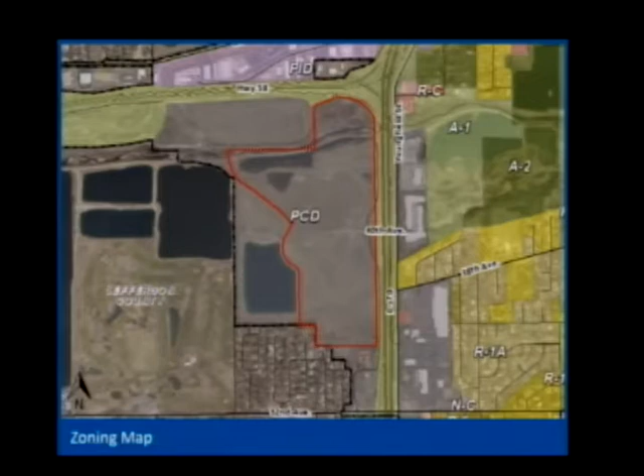The previous approval from 2011 was a very highway-oriented retail, commercial, office, and warehouse development, centered on a Cabela's and Super Walmart site.

The proposed mixed-use development is a lot more flexible. It will continue to allow many highway-oriented retail, commercial, and office uses, while proposing to expand the use chart to include residential, entertainment, and other employment uses in a very live, work, play environment. The emphasis on placemaking is also much stronger in this proposed zoning than it was in previous approvals for this property.

I'll go over the pieces of this planned mixed-use development because it entails a little bit more than we're typically used to seeing. For this project, we are reviewing an outline development plan with a design pattern book and vision book. As a quick reminder, the commissioners have reviewed many plan developments before, so you know there's two pieces to every plan development.

The first part is the outline development plan, which we're reviewing today, and then, if approved, later will come a specific development plan.

Let me describe these three documents in detail. The 4-page ODP establishes land use concepts, circulation, and the general character of the development. There's an excerpt here from the ODP document. This ODP divides the property into 8 planning areas, which you can see divided up here, as well as the arrows which signify circulation concepts that we will use moving forward in the application if it does move forward.

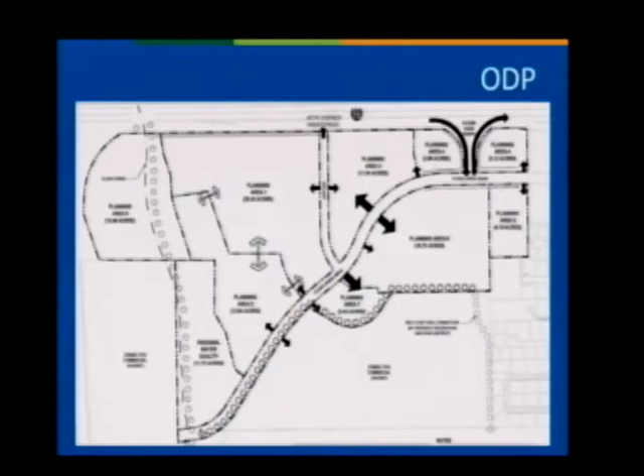The design pattern book is a type of document we don't typically see with developments in Wheat Ridge, but it's not uncommon for a development of this size. The book establishes specific development standards for each of the planning areas, as well as standards for architecture, public space, landscaping, parking, bike parking, and the list goes on and on. As you have the document in front of you, it's a pretty long and lengthy document. It's very similar in form and function to the city's architectural and site design manual, so we would use it in the same way, just specifically for this property.

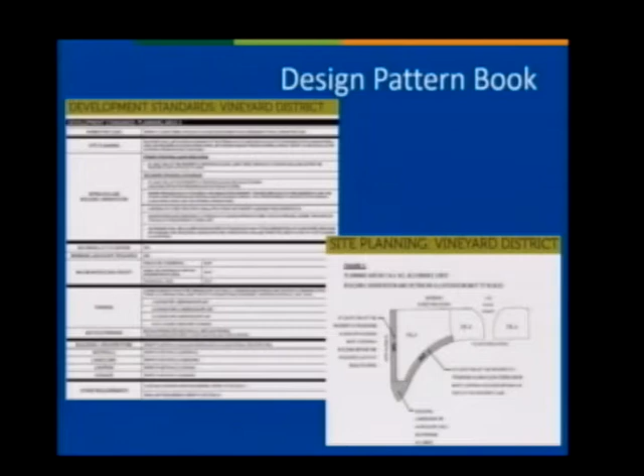The ODP and the design pattern book are regulatory documents, so if they are approved, they essentially are the zoning documents for this property.

The third item is a vision book. This vision book is less regulatory in nature. It was important in the process of developing the plans for this property and determining what exactly this next iteration of Clear Creek Crossing looks like. And it will be helpful in sharing that vision with potential future tenants of the property, assuming approval of this zone change.

As I mentioned, there's 8 planning areas in this development. I'll go through each of the development standards pretty briefly, not line by line as is in the design pattern book in front of you. Planning area 1 is located north of 40th Avenue, adjacent to I-70.

It has a wide array of commercial and retail uses. Auto-oriented uses are not permitted in this area. It also permits residential, public, hospital, office, hospitality, and entertainment uses. So it has a good orientation towards the highway, so there's a wide array of uses that are allowed.

The orientation of this property generally will be toward Clear Creek Drive with a secondary orientation toward 40th Avenue. So we'll be looking for somewhat of a build-to along Clear Creek Drive and 40th Avenue with some flexibility, as you can see in the design pattern book. One other thing to note in this planning area and several others, there's a plaza gathering space and public art requirement that will be required to be fulfilled when they come in for an SDP application.

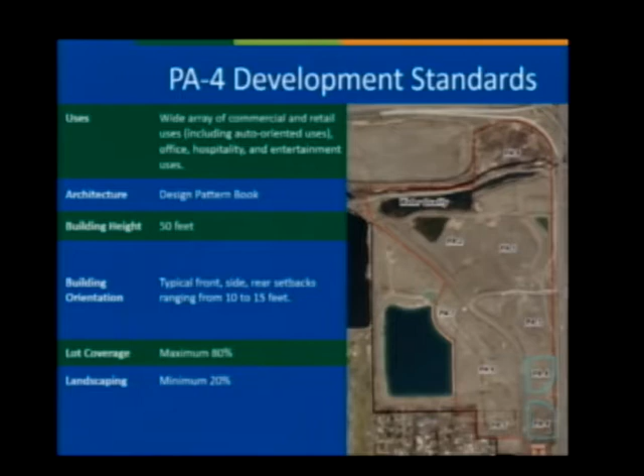Planning Area 4 is located south. It is split into two, with the proposed hook ramps from I-70 in between, funded as part of the 2E ballot measure from 2016. This is a very auto-oriented area, and the permitted uses reflect that. The building orientation is more typical of suburban development with setbacks ranging from 10 to 15 feet, and there are no build-tos in this area.

Planning Area 5 is one of the first properties you enter traveling north on Clear Creek Drive, or the future Clear Creek Drive. It has a wide array of commercial, retail, residential, office, hospitality, and entertainment uses. One important thing to note is there is a required 20-foot landscape buffer adjacent to the lower density residential to the southwest of the property.

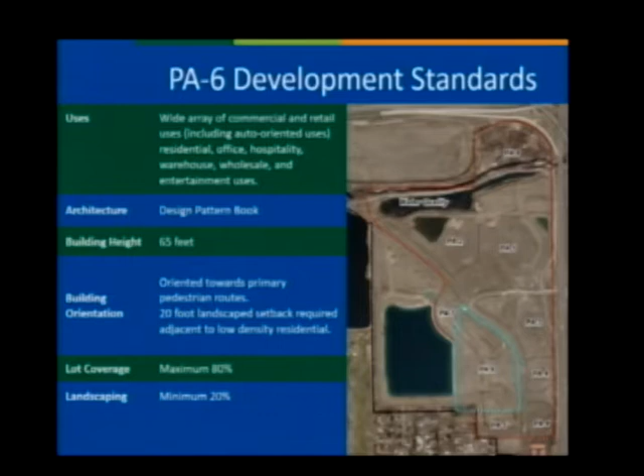Planning Area 6 is very similar to Planning Area 5 in terms of uses. Staff wants to see the buildings oriented towards the pedestrian pathways that connect to the rest of the site. This also has the 20-foot landscaped setback requirement along the small portion adjacent to the low density residential to the south.

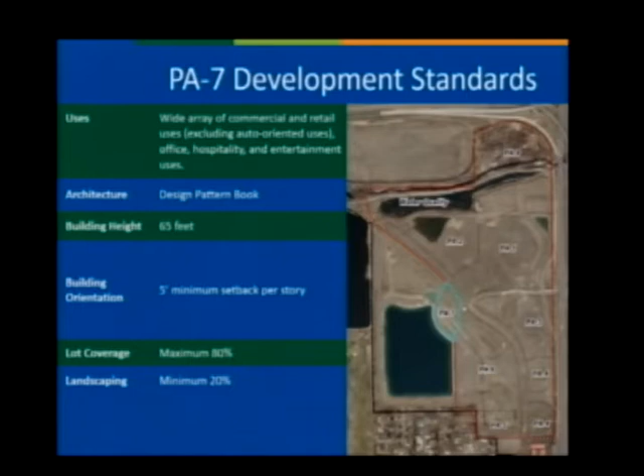Planning Area 7 again is very similar to 5 and 6, with 5-foot setbacks per story, pretty typical suburban development.

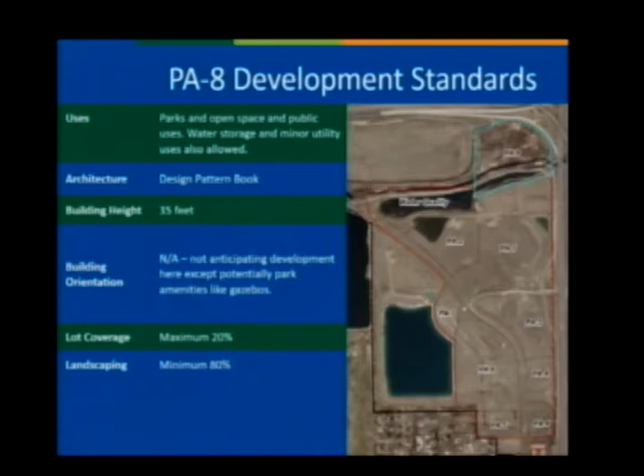Finally, Planning Area 8 is the portion located north of Clear Creek. The only uses permitted in this area are parks and open space, plus some minor utility uses and water storage. So there will be no development on this section—parks and open space only.

Got lost in my notes here, sorry.

There was a neighborhood meeting held on December 6th of 2016, with approximately 60 neighbors in attendance. Questions generally ranged from potential tenants, number of units proposed in the residential portions, trail connections, and the like. The applicant has held additional neighborhood meetings as recently as earlier this month, outside the city process, done in good faith to keep the neighborhood engaged given the long process. They've also held additional meetings on topics including I-70, the hook ramps, potential transit access into the site, leasing focus groups, and other things that go into making a project like this work.

As with every zone change, there was a public posting and notification requirement. We did not receive any letters until today—we received one letter of support that was passed out on the dais when you arrived. We also received one phone call or message; I returned that call but never heard back. They were asking about this public hearing, so hopefully that person made it.

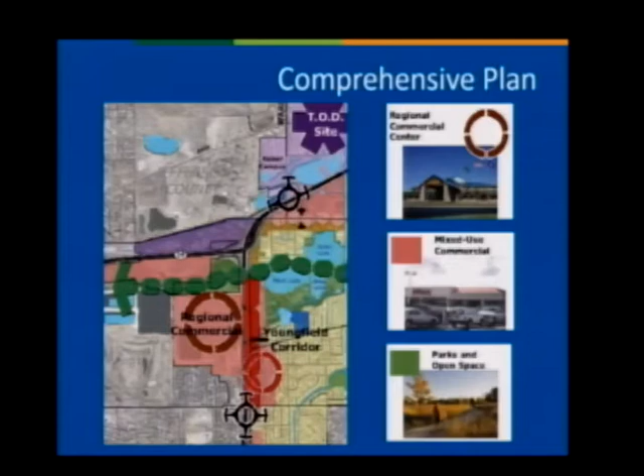While the current development plans differ slightly from the comp plan designation of solely commercial, staff feels the inclusion of residential components and smaller tenants anchoring the site, as opposed to two large ones, is indicative of changes in the retail market, changing housing demand, employment locations, and smaller retail in the metro area marketplace. The comp plan is nearly 10 years old, and it is in the public interest to approve a zone change that responds to these changes in the metro area marketplace.

Just quickly, I'll flash these up and I won't read them. These are the outline development plan criteria: health, safety, general welfare.

The proposed development is not feasible under any other zone district, which is why a planned district is being proposed. There's adequate infrastructure and facilities on the site, or there will be, and the change of zone is in conformance with the comprehensive plan goals, objectives, and policies.

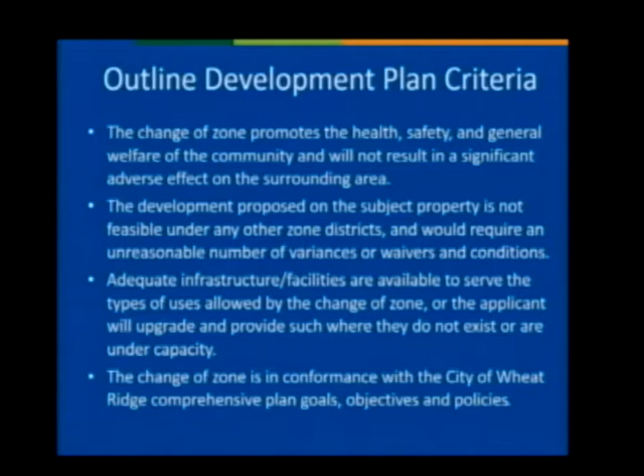So staff recommends approval of the zone change from planned commercial development to planned mixed-use development for the following reasons. We find that it does promote the health, safety, and general welfare. It will not result in a significant adverse effect on the surrounding area. It will be adequately served by public infrastructure and utilities, as is detailed pretty thoroughly in the staff report.

It is consistent with the goals and objectives of the comprehensive plan, in addition to providing for a community need that was not anticipated at the time of the comprehensive plan adoption. It also provides a circulation network that is supportive of the city's goals related to bike and pedestrian connectivity, which we recently passed the bike and pedestrian plan.

So this is just another reason for staff to support the project. We would add one condition to the approval, and that would be to add residential heights to planning area 1 of 65 feet. That height is consistent with the adjacent planning area. It was just an oversight that residential is allowed in planning area 1, but there was no height specified for that specific use. So staff would recommend approval with one condition, and we can go over that again once we loop back to that point in the hearing.

So at this point, I'll take a seat and we can answer any questions that you have on these documents, or anything that's in the staff report. And then the applicant is, of course, here and prepared to make a presentation as well, if you desire. Thank you. Commissioner Bucknam?

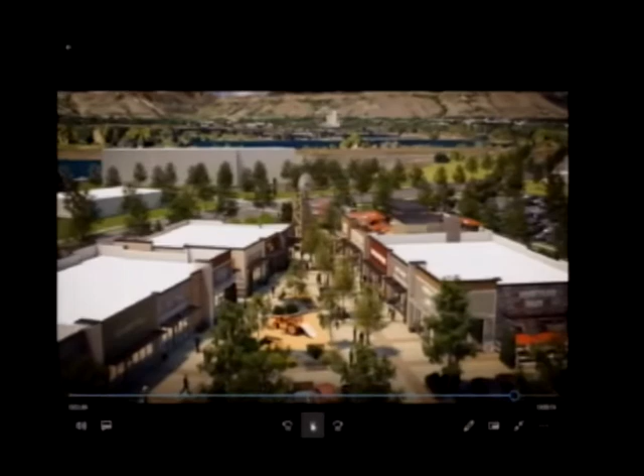As a quick preface, what you have before you tonight from a zoning and design pattern book standpoint is the result of about a year and a half of work—thousands of man hours and hundreds of thousands of dollars for our company—in an effort to transition this property from a vacant piece of land that's sat undeveloped for decades into a long-term community asset for the city of Wheat Ridge and the greater Applewood area, most of which isn't even in the city. Right now, finding a place where the community can gather on the west side of town is hard to find. As much as I love the Applewood Center, it's not a place you want to linger in the parking lot very long without risking your life. With this property, we have a unique opportunity to create a mixed-use environment where development occurs that's not otherwise possible within the city, partly because of the flexibility allowed in the zoning documents before you.

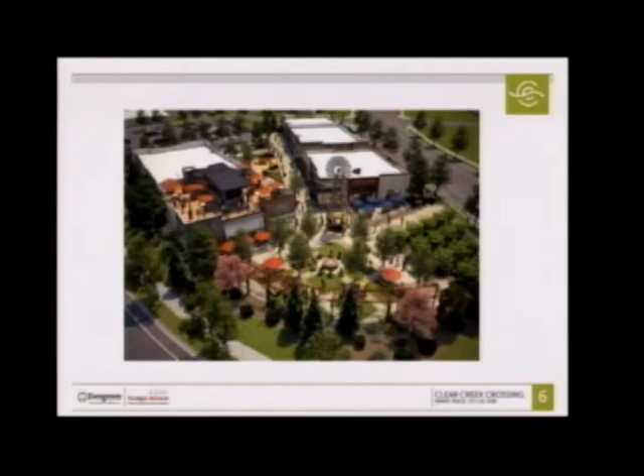But what we're trying to do here is create environments within a broader project that have that sense of place, where you feel safe, where you can linger - and it's really important to us.

So another shot of that with some really great western views. Again, when you're planning a 100-acre project, you have to divide it into districts.

I don't want to belabor this, we've already gone through it. We've got the Mill District, with employment, Homestead, intended to be residential, Vineyard, intended to be retail and food-oriented, and Harvest, intended to be more retail and entertainment-oriented.

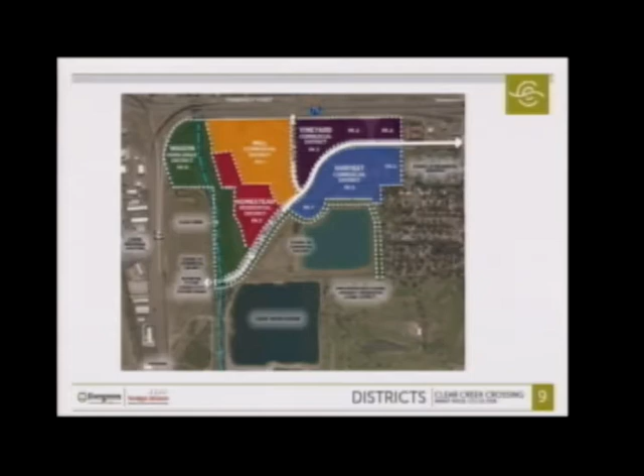How do you interface with the street grid? How do you create build-tos to create a sense of place when you've got topography you're trying to manage? How do you address and take advantage of the asset that Clear Creek presents, and orient planning areas 1 and 2 to leverage that asset? How do you take advantage of views of the mountains?

How do we also dance around the fact that Denver Water right now is dropping a second 84-inch pipe that slashes right through the project that we can't build on top of?

And then how do we be sensitive, as you raised, Councilman, to the neighbors who have lived there for years, who have overlooked fields and have got horses in the backs of their property, as Roxanne does—I know her. How do you be sensitive to that? Because their life is going to be changed. There will be more light, there will be more noise. How do you mitigate those impacts to the degree possible?

So the street network and the placement of these planning areas is a result of us analyzing all of these site constraints that impact how you can plan this property.

And then once you do that, we've got to interface all the connectivity, both vehicular circulation and pedestrian circulation. One thing to highlight on this slide is the dotted lines.

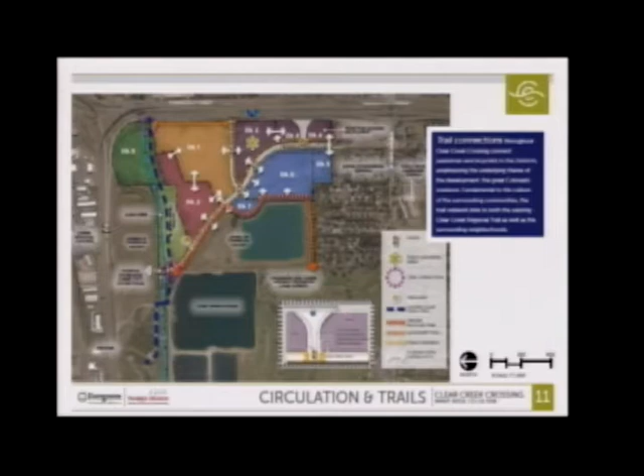So we're actually routing pedestrian traffic on the east side of Clear Creek Drive across to the west and then back over, because we wanted to avoid that pedestrian conflict. So all this being said, it's been very intentional and thoughtful about the interconnectivity between planning areas, reflected in those white arrows, and also connecting the neighborhoods across the site to the creek.

Right now it terminates and turns by the La Quinta. There's a gap west of the La Quinta that's a field where right-of-way has already been acquired. That's where Clear Creek Drive will connect through. So job number one is to build the new off-ramp.

Once that's complete, number two is the existing 32nd Avenue off-ramp will be decommissioned and removed, and you'll no longer be able to get off there. You'll get off at number one. Then the third thing, which addresses your concern, Commissioner Dorsey...

Number three, there'll be a new flyover bridge. The new on-ramp at Clear Creek Drive will run parallel to I-70 but not merge. It will go over a new bridge across 32nd Avenue, meet up with the existing 32nd Avenue westbound. They will pre-merge, and then downstream merge onto I-70.

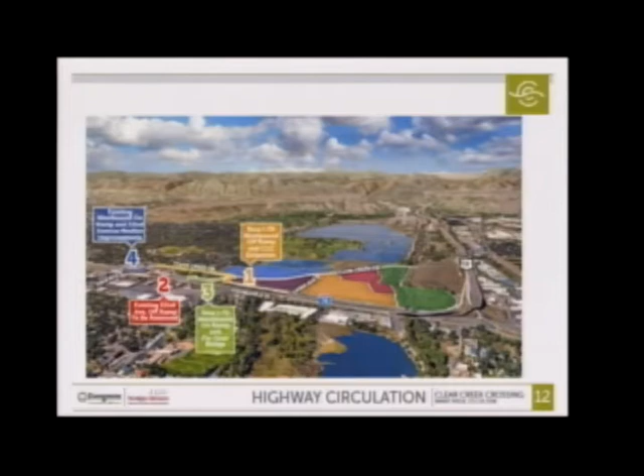Back to the districts, I don't think we need to belabor it. We have cute names, we have cute pictures. The intent is we have real uses that address the needs of the region and community going forward.

The Mill District is focused on employment uses. It's where the highest intensity and heights are allowed in that district.

Because we don't have a committed anchor or employer user for this, Commissioner Ohm, we've asked for the broadest possible set of uses within reason. We had a lot of discussions over the last year about what's reasonable to request, because we're looking at things from R&D campuses to Amazon HQ2 to potential hospital uses, to more traditional retail that could still happen here.

I don't think we're going to get Costco showing up wanting to do another store, but that's still possible. Planning Area 1 is where Cabela's was originally going to locate, so it is a great retail site. The problem is, because of Amazon, there are no anchor deals being done right now of any significance.

So this planning area has two primary access points: a signal on 40th Avenue, shown in the graphic, and another full-movement driveway that splits with the Homestead planning area on Clear Creek Drive. There are build-to requirements that vary depending upon the type of use.

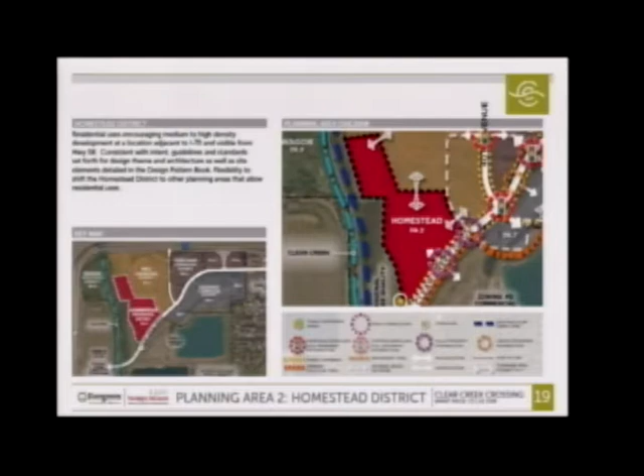And your western views will be unimpeded because it's Coors water storage facilities. It's going to be a tremendous place to live and a great opportunity for someone looking for that type of lifestyle. Access will be off Clear Creek Drive, and interconnectivity with Planning Area 1 is really important. I won't go through all the details, but we can circle back if you'd like.

Vineyard is the heart of the project in terms of placemaking, but because of the topography it's kind of broken up, which is why there's a Planning Area 3 versus a Planning Area 4. Planning Area 4 sits high, as Commissioner mentioned, basically directly north of La Quinta. It's where the homeless camp used to be—I met our friend there before we cut some of the trees down.

It's going to be very intense from a traffic standpoint because that's where the freeway traffic comes in and out. One thing that impacts Planning Area 4 is what's called an A-line—CDOT has this line you cannot cross with access, basically a certain distance from highway interchange ramps, which impacts the planning of Planning Area 4. But it'll be more traditional automotive highway type uses.

Then Planning Area 3 steps down—that's where there's the significant falloff, and we can use that topography to our advantage. In the corner of Planning Area 3 is where we anticipate doing the crossing, where we're going to create a placemaking environment. No development is allowed at that point by zoning, and that's where the plazas will be. It'll actually sit higher than Clear Creek and 40th Avenue at the intersections, elevated above the street traffic, which will be a really nice effect.

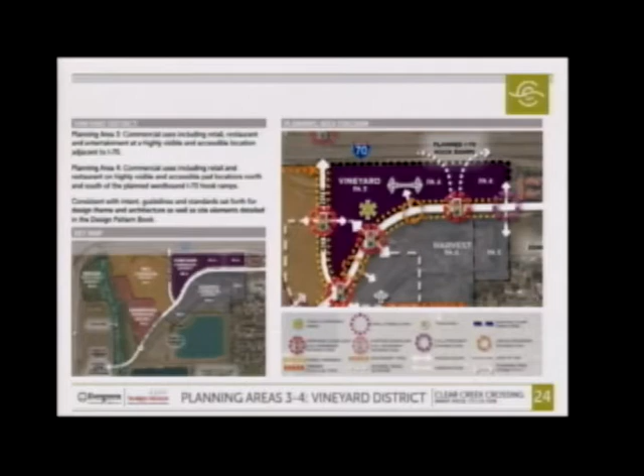Then the Harvest District includes Planning Areas 5, 6, and 7. Planning Areas 5 and 6 are in a hole, and one thing that's easy to get confused—just to the right of Planning Area 5 you can see another area of green. That's the lot that sits at grade with the homes. It's not owned by us, it's not in our project—it's owned by a different developer, actually the one who did La Quinta, the gas station, and Good Times. So that sits high, and that's where I absolutely agree with you: if we were planning that area, 65 feet would not be permissible.

Planning Area 5 is the sled hill—it's the hole. It was going to be the back of house for Walmart, as you mentioned. Walmart was going to go on Planning Area 6, and Planning Area 5 was going to be basically the hole behind Walmart where the loading dock activity would be. Because 5 and 6 sit anywhere from 40 to 60 feet below the houses, we believe there's an opportunity there for height.

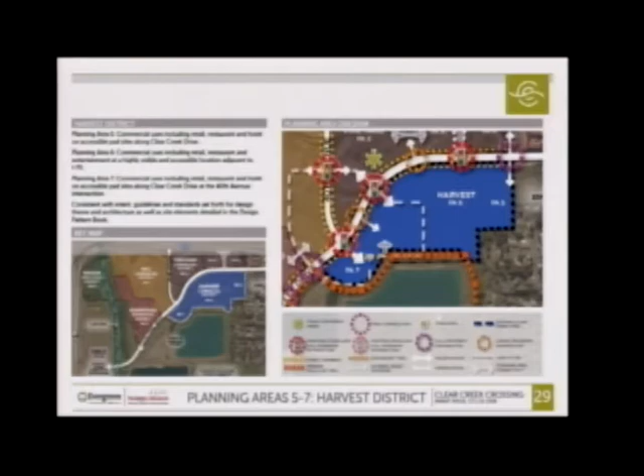The intent is not to do height here—it's probably going to be single story structures. Our goal here is this is where the entertainment piece of the puzzle is. We've been approached by several niche movie theater concepts, dinner theater type—not Boulder dinner theater, but where you can eat and watch a movie at the same time. We think that could be a really exciting use in this planning area. We've also been approached by more family entertainment groups that do bowling and billiards, all indoor. So there's not going to be a go-kart track or anything, but indoor type entertainment uses.

Uses similar to, if you're familiar with, the Lone Tree Entertainment District immediately south of Park Meadows Mall, where they've got the indoor skydiving place, the movie theater, and the restaurant district—that's the type of uses we see going in here, which will be an entertainment anchor for the project.

We also believe Planning Area 7 is a great opportunity for a hotel site, because across the street catty-corner you'll have the food plaza district, the crossing, the entertainment to the south, amazing views to the west across the lake and ponds, and close proximity to the highway with great visibility. We think Planning Area 7 is a really unique opportunity for a hospitality user, and we're in conversations with several about the project.

Lastly, but definitely not least, is the Wagon District. This area is being deed restricted to only open space type uses. In terms of private ownership, it will be owned by the Metropolitan District. This whole broader property has a district on it called the Longs Peak Metro District, created by Cabela's back in the day. It's currently managed by two companies, us and Coors, since some of the Coors land is in that Metro District. The purpose of a Metro District like that is to own and operate long-term open space properties that cities or counties don't want to own.

They will be the ones managing and maintaining the water quality ponds. The trailhead will be in there, along with the gold panning area that's close to the intersection of the two highways.

Longs Peak Metro District will also be the financing vehicle for the public financing that occurs in the future, as Ken referenced. But the financing picture right now is unclear because we don't have any committed anchors for the project. What we're trying to do is essentially set the table with the zoning, to then this year make those commitments with anchor tenants to be able to launch into construction and actual development.

So the architecture—because of the agricultural and mining heritage of Wheat Ridge, and specifically the Clear Creek corridor—we very early decided to take an architectural theme based on what we're calling contemporary or modern agricultural type vernaculars, with pitched roofs and color.

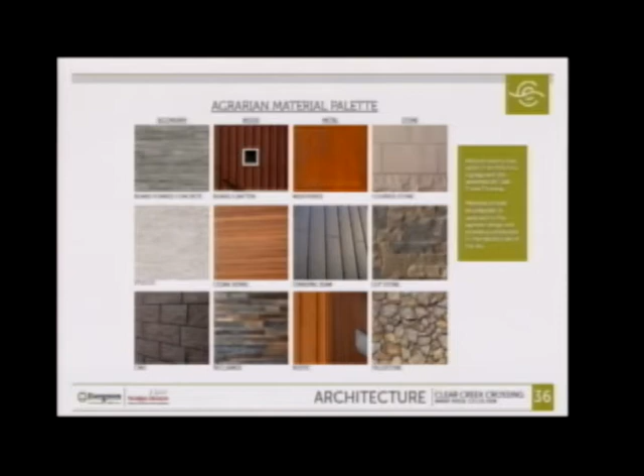That was something we spent a lot of time on with city staff. The other thing we spent time on is signage. Signage is one of the most under-leveraged assets in a project. If done right, it can make a fairly pedestrian project look so much more interesting and attractive, if you use it as an architectural and artistic feature versus just a box with neon lights behind it that's got Johnny's Pizza across the front—that's very utilitarian.

That's great for getting the message out, but it's not great for expressing architecture, for expressing brand, for expressing interest in the project. So we took a very thoughtful approach to the signage package, not only allowing a lot of opportunities for signage, but allowing for creativity in the signage and theming of the project that will help it be more attractive to users.

If you get into the weeds of it, it allows for that. As an example, if you ever have a chance to go out to Stapleton, this Eastbridge Town Center project that we just recently opened did a great job. We did a creative sign package under the City and County of Denver.

It's an interesting approach to letting a tenant express who they are, but in a way that's attractive to neighbors. Very important. And then lastly, landscaping is going to be one last unifying approach to the project. Because of our level of detail right now, we don't have landscape plans for you to review — that will come at the SDP phase. But we've allowed for a plant palette and planting methodology that we think will allow us to use landscaping, signage, street furniture like trash cans, lighting, and benches to unify this project, so when you drive into it you immediately know you're at Clear Creek Crossing, and you know when you're leaving. That becomes a familiarity that's attractive to the neighborhood long term.

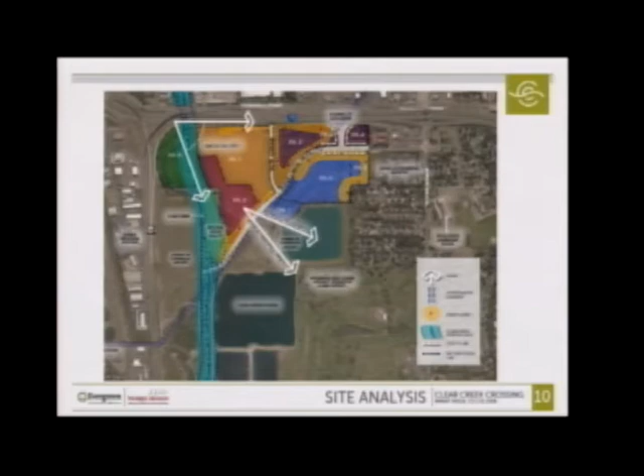We will do the discussion typically after we get the second, and then we can have a discussion about any additional conditions, clarifications from staff on any conditions.

I'd like to make a motion on WZ 1607, Clear Creek Crossing, by name and case number, that this decision be delayed for two reasons. The use schedule hasn't been publicized to the neighborhood in a neighborhood meeting, to my knowledge, and that 24/7-hour facilities not be in the use.

So this is a motion for continuance. Is this a motion for continuance? It sounds like it. Okay, is there a second? If there's not a second, then the motion will fail. Correct, if there's not a second, then the motion will fail. Yes, and I'd like to be given an opportunity to speak to the process at some point.